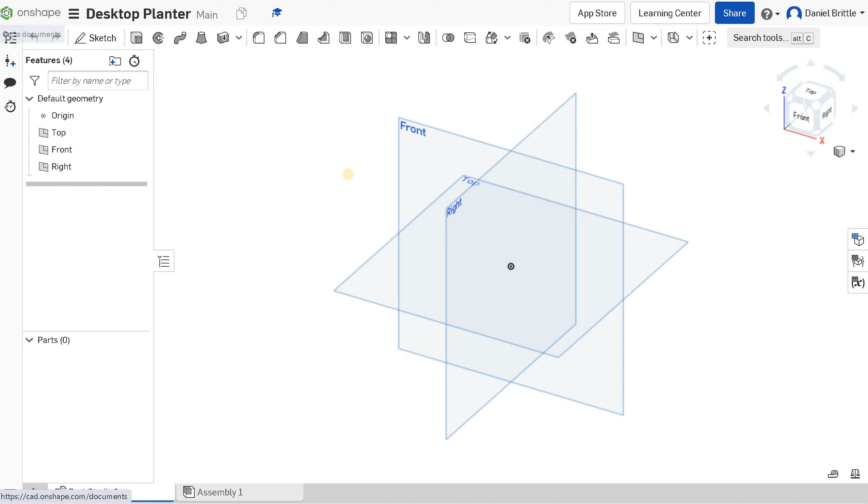Let's have a go at creating a desktop planter. I'm going to start with the front work plane and create a sketch, starting with a square from the origin.

Don't worry about the size when you drag it out because we'll add our dimensions on. It's going to be 140 millimeters tall, starting with the outside part, by 160 millimeters wide.

Okay, so you can see that I have not yet changed the dimensions on the workspace units, and that's caused me an issue straight away.

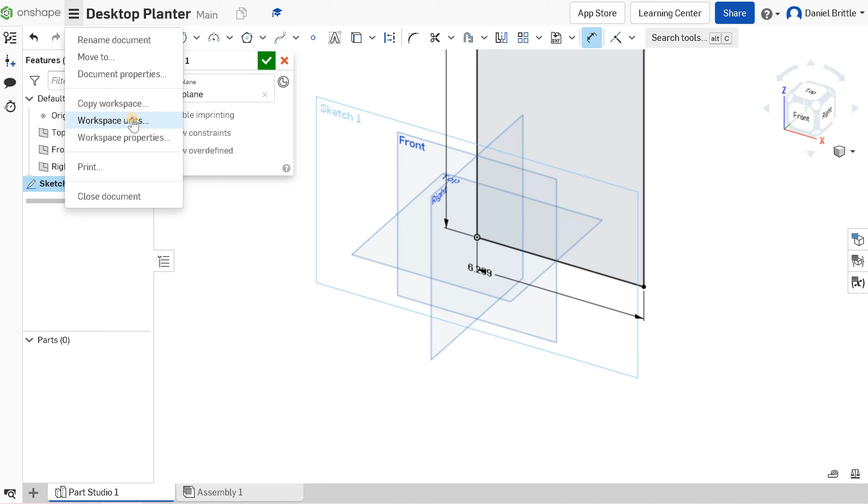So go to workspace units, change it to millimeters and click tick. All that means now is I'll have to go back into the sketch, edit dimension this outside one up, click on the dimension I've already done, change it to 140 millimeters and press enter. There we go, we've got the correct size now, so we're off to a flying start.

I'm going to draw a second rectangle inside, and the distance I want to leave is 15, since the timber we're using is going to be cut into 15mm square section. So with a little bit of maths we can figure this out.

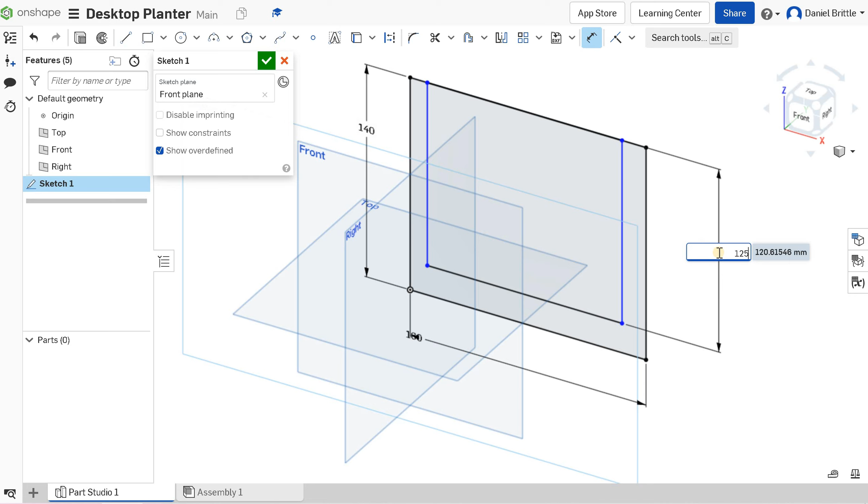140 minus 15 leaves us 125, and on this width here, 160 minus 30 leaves us 130. We just have to even up the spacing by doing 15 on the one side.

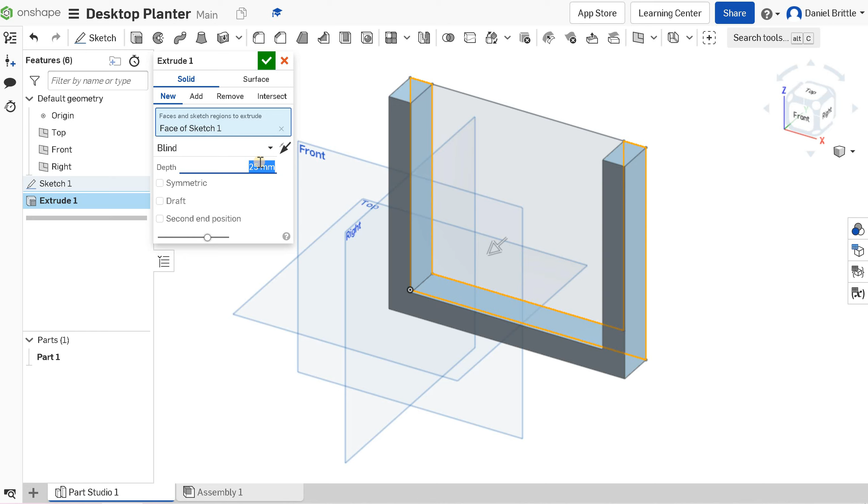Click tick, and we're happy with that first one. So let's extrude the U part of that 15 millimeters and press tick. So we've got the outside square shape.

Now the inside square shape, we're going to go on the front again and start a new sketch. We're going to drag out a rectangle in between these two - you can snap it between the orange parts, making it really easy for you.

The only dimension you need to worry about is the height. The height of this is going to be 110, which should leave a 15mm gap at the top, and it's already started 15mm higher, which is why it's considerably smaller.

Draw your square in again, and let's repeat the process. This height is going to be 95, taking 15 away from the 110. The width is going to be 130 minus 15 on each side again, so we're at 100.

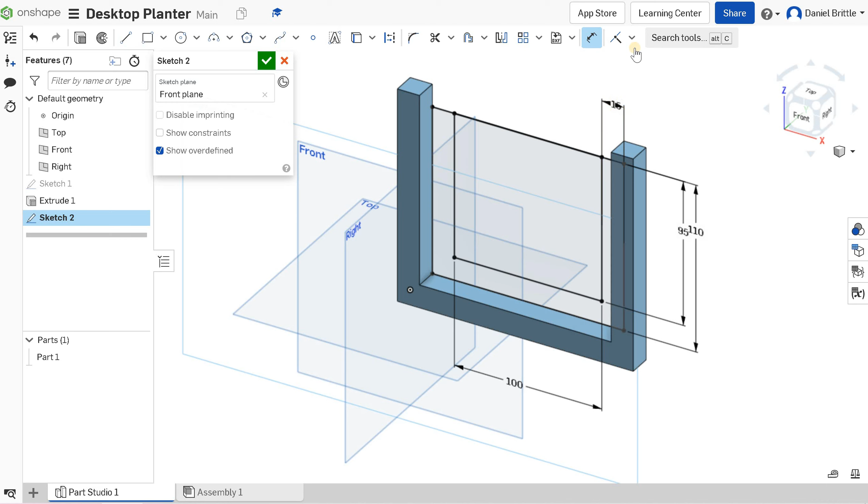All we have to do is make sure the dimension between these two parts is 15, so we're even on both sides. Just checking that's all looking right, lining up in the correct places, which is all good. Let's click tick.

Extrude this part - once it's a new part, make sure it's not adding to the other one, and 15 millimeters, click tick. Okay, so we've got those two parts created.

We want a hole going through that we can put a bolt through so that they can pivot. So on this outside here, we're going to create a sketch and draw a circle on the side there.

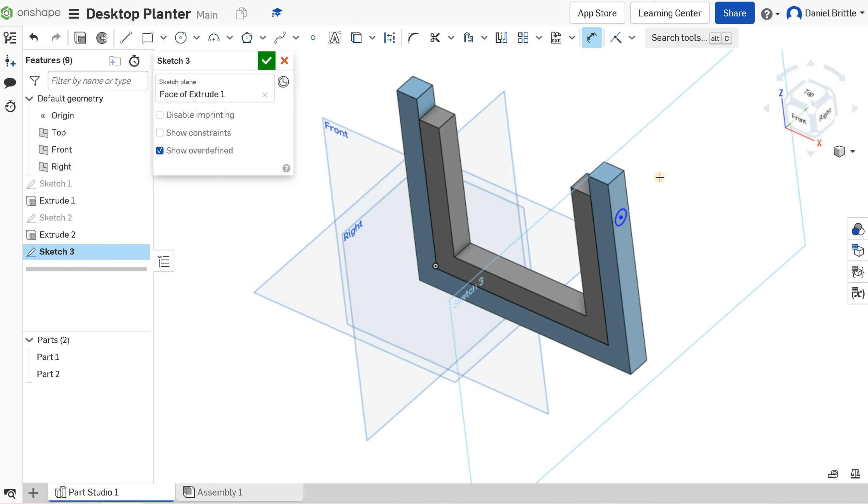Let's give that a diameter. I'm going to zoom in and just look at it from the right to make it a little bit easier to do. We're going to give that diameter - dimension onto there, diameter of 8.

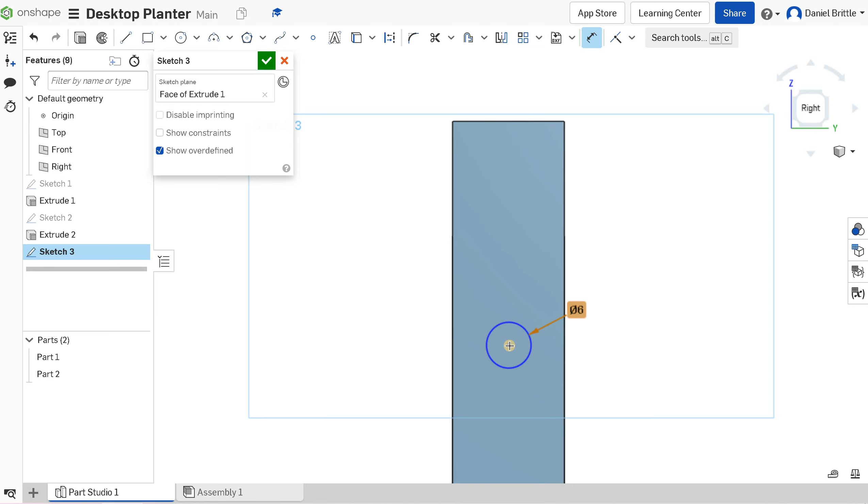In fact, we'll make that a little bit smaller - let's make that a 6mm diameter, and the distance from there to the top.

Remember, we've got a 15 gap, and then we want it even, so we want 15 plus then 7.5 down, so we're even from both sides and the top. So we're going to go 22.5 millimeters down.

Okay, so you can see that circle's positioned fairly well down from the top. We just need to make sure it's even from both sides as well, so that's going to be a distance from the center to the edge, 7.5.

Even if it looks right, always put a dimension in to be 100% sure you know where it is. We can finish that. Now let's extrude.

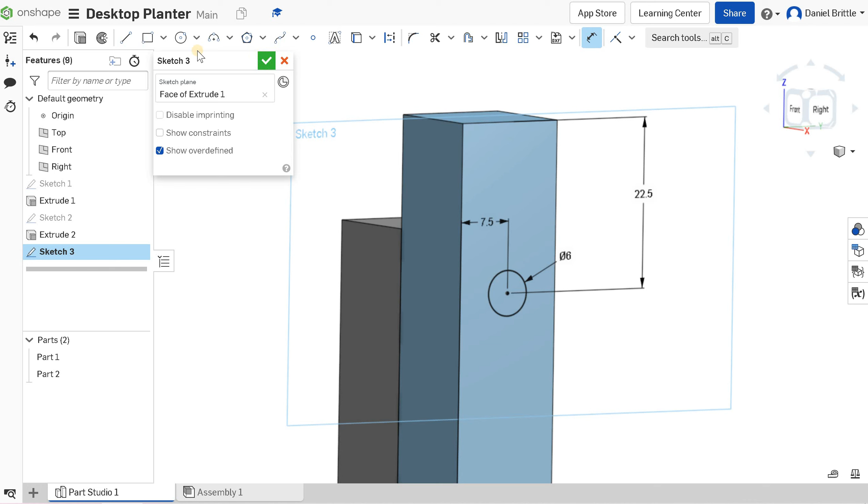We want the circle, we want it to remove, and our merge scope is going to be with both parts. So when it goes through both, instead of being blind, we're going to go through all. And if we zoom out, let's see if this does work.

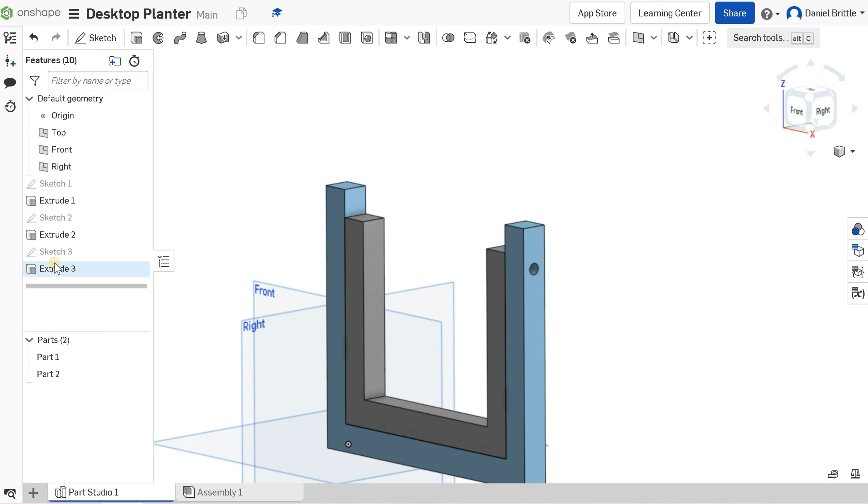It's gone through part 1, but it doesn't look to have made a hole in part 2, so we will need to redraw it. I was hoping it might go straight through both, but we weren't lucky enough for that. If we look at that from the front and hover over Extrude 3, you can see where it has gone through and where it's missing.

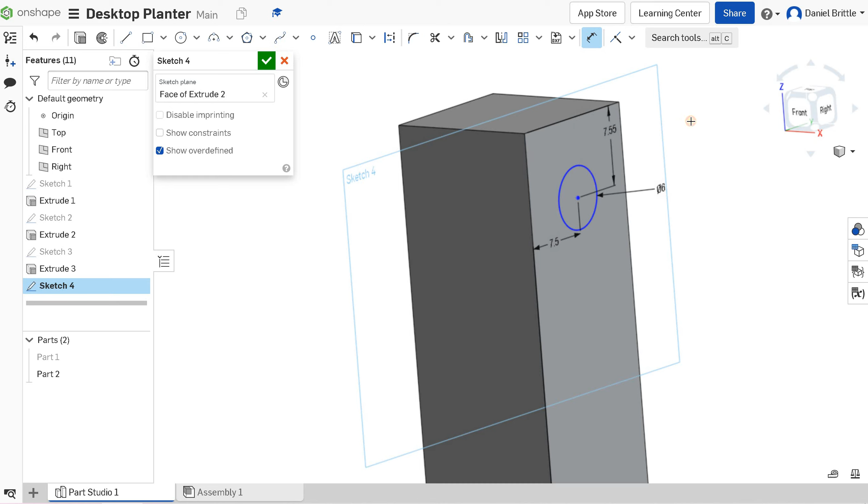So what we'll do now is hide part 1. We're going to zoom in on the end of part 2, start a sketch on this face, draw your circle, and add your dimensions as we did before: diameter 6mm, 7.5 from the edge, 7.5 from the top. Click tick, extrude, click on a circle, remove through all, then click tick.

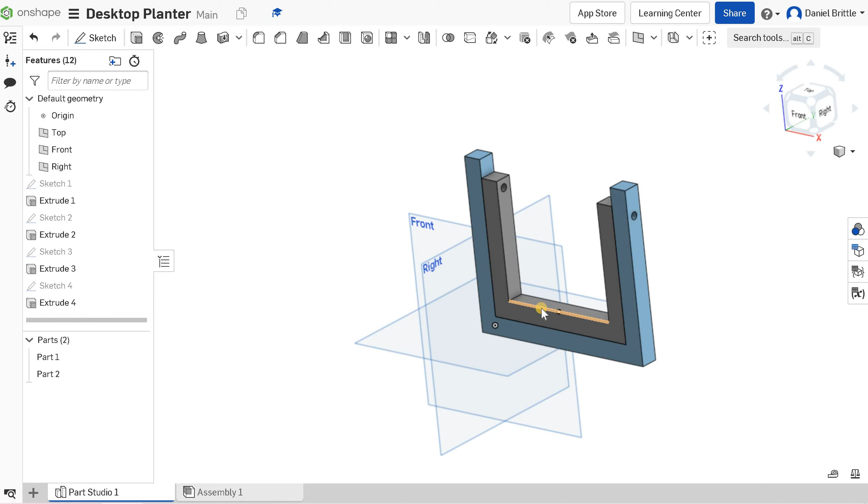We can unhide part 1 now, and all being well, when we zoom out and rotate round, it all lines up nicely. We can see through the whole part, which is where our nut and bolt will go through. When we animate this together, those two parts should rotate together and rotate away from one another as well.

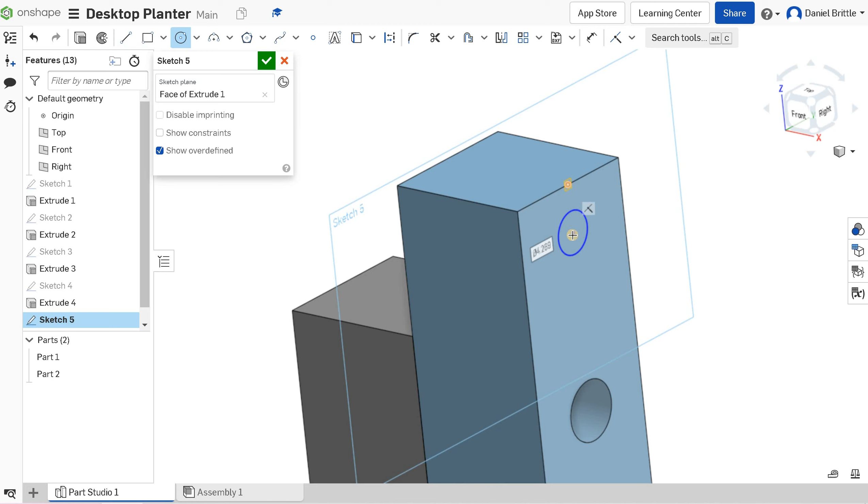The next part now is to put the holder for the plant pot through this top part, so we're going to create another hole. On the right hand side, sketch, we're going to draw a circle, zoom in. That dotted line was making sure it was in the center, which is quite useful. This is going to be a 3mm diameter hole, and we want it nice and evenly spaced, so 7.5 from that top. Click tick.

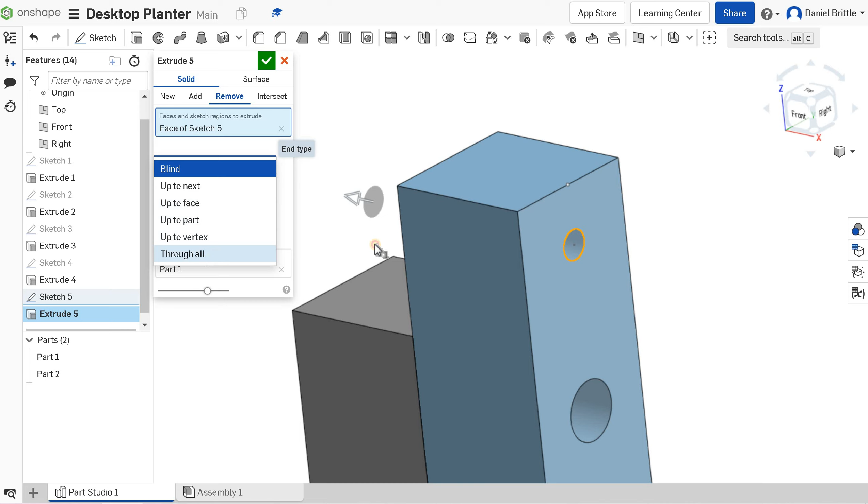Extrude, click the circle, remove, and again through all, so it goes through both halves. Save yourself some work further down the line.

That part's done. The next part now is putting the bar straight through. To do this, we want the bar to stick out from this side and out from that side, so we can fit a threaded nut on the end.

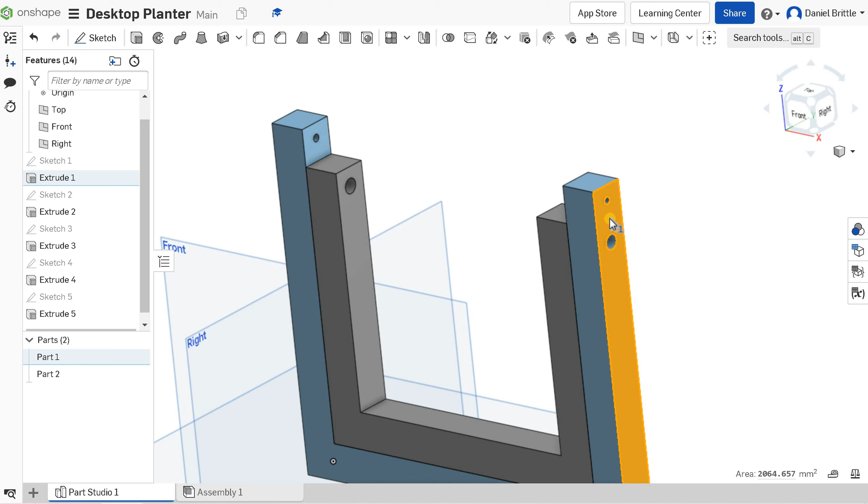So to do that, we're going to create a plane that is just 6mm away from this edge. I've clicked on this face here, I'm going to click on plane, and if we look at it from the front, you can see the gap it's leaving there, and we want that just to be 6mm away. Okay, so we can see that 6mm plane is now in place. Click tick and confirm it.

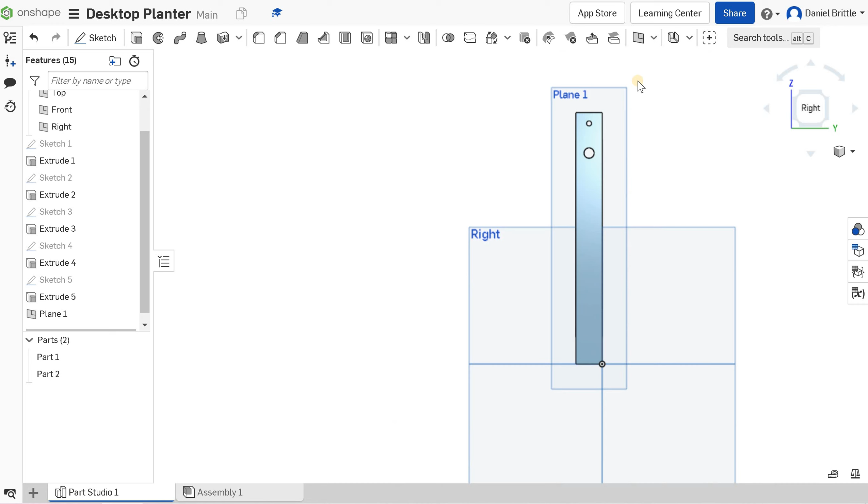On that right hand side, if we look at it from the right hand side, we're going to use plane 1 to draw our circle, which is going to be the bar, and it's going to line up with that circle that already exists. So if we just draw that in any size for now and start to restrict it with our dimensions.

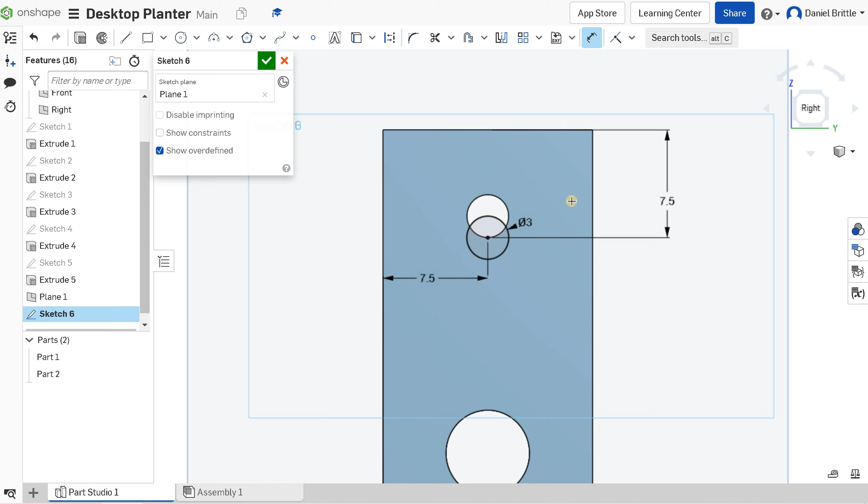And we can remember this is 7.5 from the top, 7.5 from this side as well. Okay, so we can actually see there that that 7.5 split is slightly different, which insinuates to me I made a mistake on the last sketch.

So I'm going to click tick, go back into sketch. You might not have made this mistake on yours, so just double check. I can go edit sketch, and yes, you can see that I've measured from the bottom of the circle, not the center. So I'm going to delete that measurement out and put a new one in.

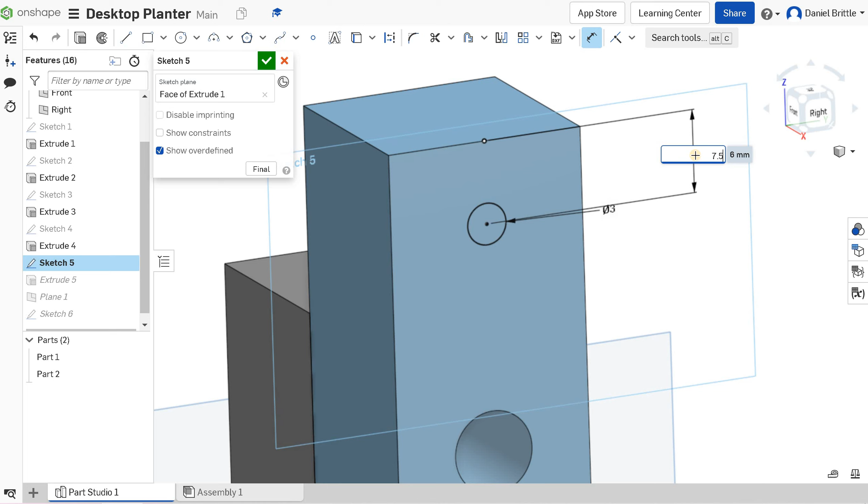It should be from the center of the circle to that edge, should be 7.5. Click tick, that will all update, and now that sketch I've just done should line up nicely. There we go, that's much better.

So let's just position it in a 3D view so we can see what's going on when we extrude. Click extrude, and we're going to extrude sketch 6. That's going the wrong way, so we can flip that to go the other way. And now if we just think about the dimensions for a second, we can make sure it all fits in.

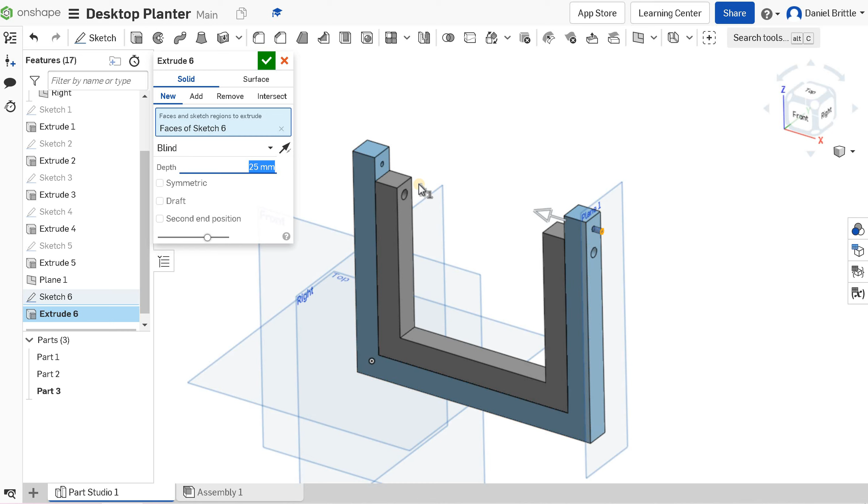So the width that we created on the original part was 160, and we want that bar to go all the way through, plus the 6 sticking out of either end. So it's going to be 172 in total. So in the depth here, 172mm, click tick, and you can see it's sticking out slightly from both ends.

We put a nut on there just to hold it into position. The last part now is creating the bars, and this is where we can be a little bit creative.

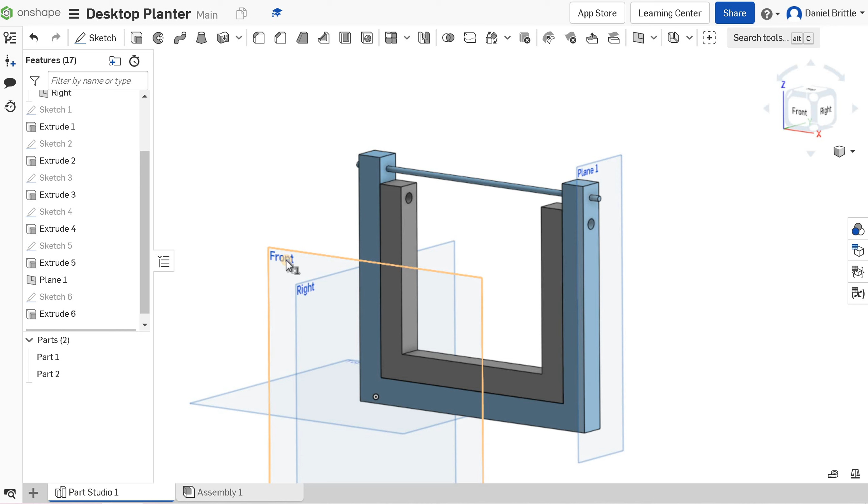So I'm going to do something relatively simple, but if you want to change it, this is a point you can have a little bit of fun with it as well. So I'm going to do it on the front work plane, and I'm going to view it from the front as well. Okay, so we're just going to zoom, get it centrally fitting onto the screen.

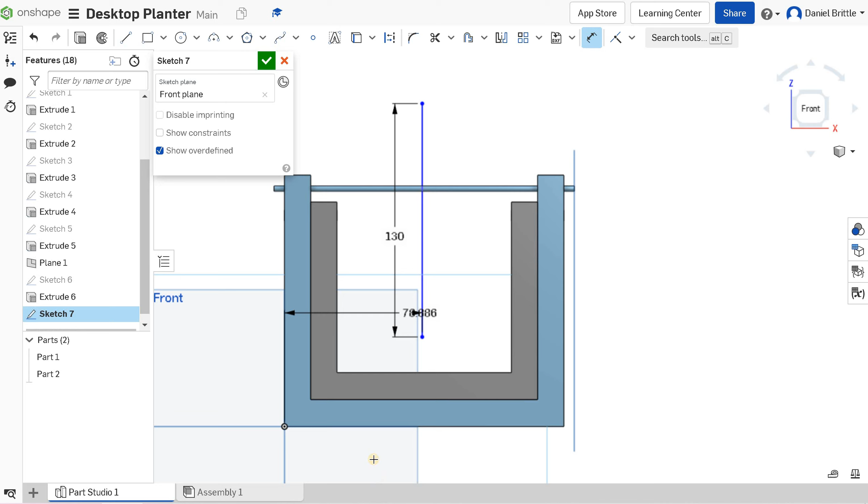I'm going to start a new sketch, and I'm going to draw a line straight up the center that I'm going to restrict with some dimensions, and that's going to be the line that my whole vase rotates around. So that's kind of the central line of it, the central axis of it. Let's dimension that. So I want that to be, let's say, 130 tall, and I want it to be in the middle. So from the origin to the line, we're going to set that distance at 80, so I know it's exactly in the center.

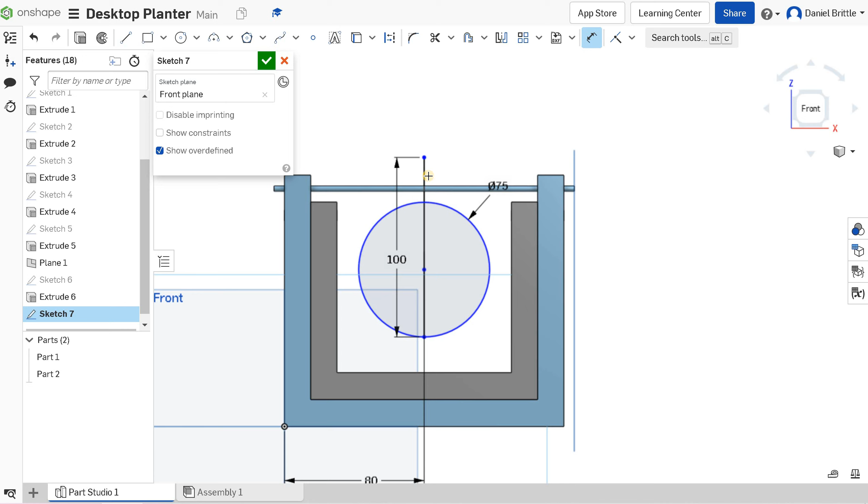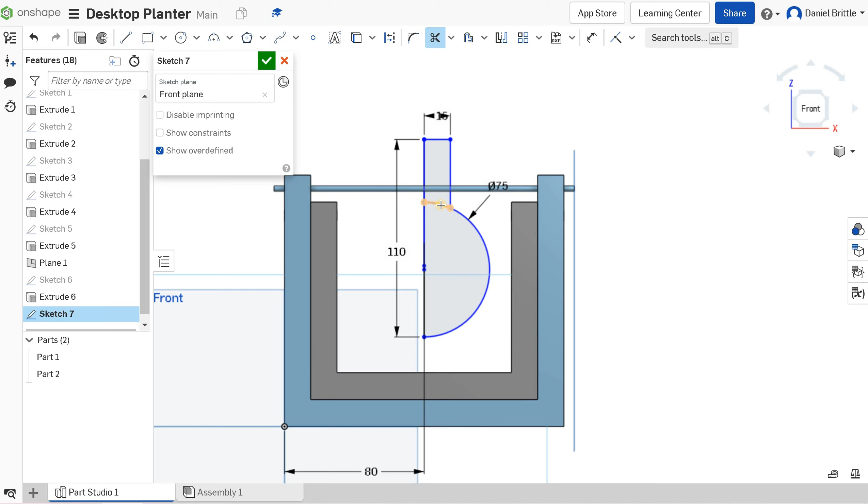And I'm going to draw a rectangle now down this side, just like that. So you can start to see the shape that I'm going for. Let's add some dimensions on. Let's make this 15. Doesn't matter that it's coming further into that, that's exactly what I want. So now I can use the scissors tool. I only want to keep half of the vase for the revolve that I'm about to do, and I can chop all of the other parts away. So that's the vase shape that I'm going for. I'll click tick, and I've got that lining up.

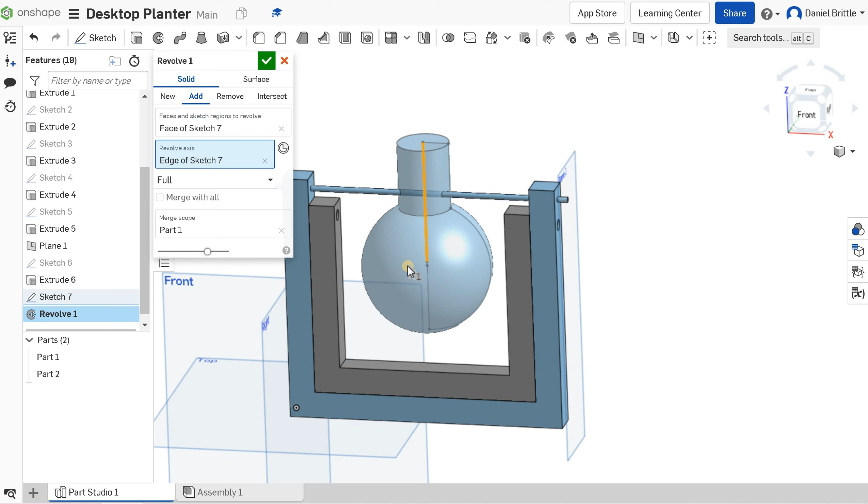Okay, so now we're going to go for the revolve. So if I click the revolve tool, I want to revolve this sketch, and then the revolve axis is the line that we drew in first. So click revolve axis, click on that line, and you can see it shoot all the way around, which looks just as we want. In fact, the plane front was slightly off, so we might go back and change that a little bit later on. I'm not in a rush to do that at the moment. We don't want to add it to the part, we want it as a new part of its own, and I can click tick.

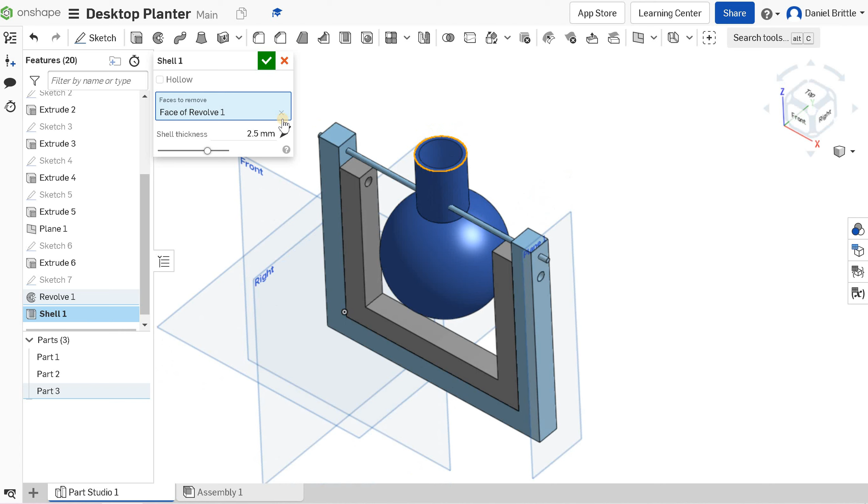We want it to be hollow, so we're going to use the shell tool. When we're hollowing it, you can't tell that anything's been done yet, so we've got to click on where we want the hole to be, and that's going to be at the top. And you can select your wall thickness. We're going to make it 2.5 millimeters thick, and click tick. So you can see now that if we rotate that around, you can see all the way in.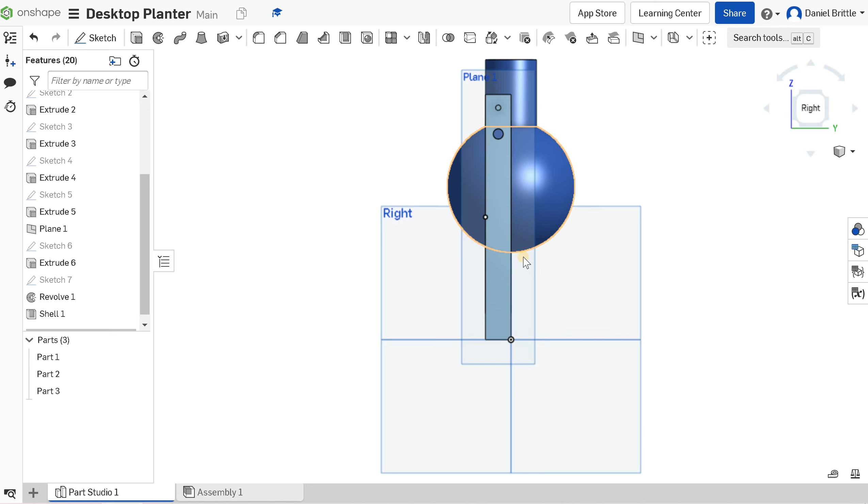To get this now in the center and get that bar going through the middle, if I click on the right here, you can see the front work plane is sat at the back of those two wooden parts. So we need another work plane that's in the center, and then we can change the work plane the vase was created on. So let's create the new work plane first. So click on front, and we did this before, click on plane at the top, and we're going to offset it 7.5, which is half the thickness of the wood. And you can see plane 2 is sat just in front. It's only a tiny difference, but being pedantic and making sure it lines up is what this is really all about.

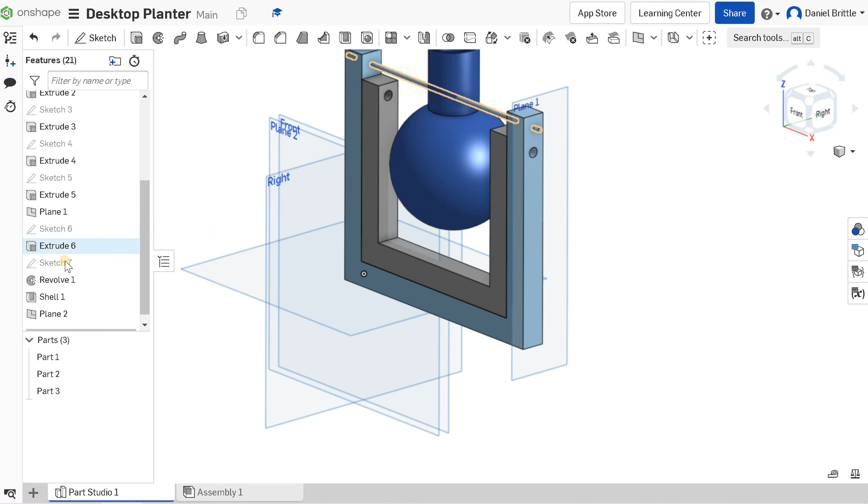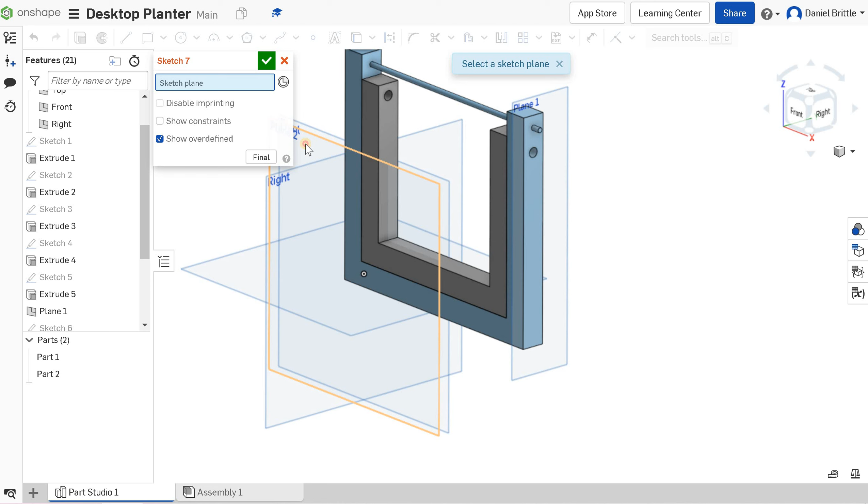We can now go on to sketch 7, which is that one there. Plane 2 will need to have been created before sketch 7. Otherwise, when we go to edit it, it will forget everything that's happened after. So sketch 7, and we're going to edit. And you can see here, sketch plane, we can change. So if we close front plane, we can actually select plane 2 and click tick. And now when that's done, you can see it's now going perfectly through the center.

So that is a desktop planter pretty much created. All that we really want to do now is assemble it in the assembly view and start to change the materials, which we'll do in the next tutorial.